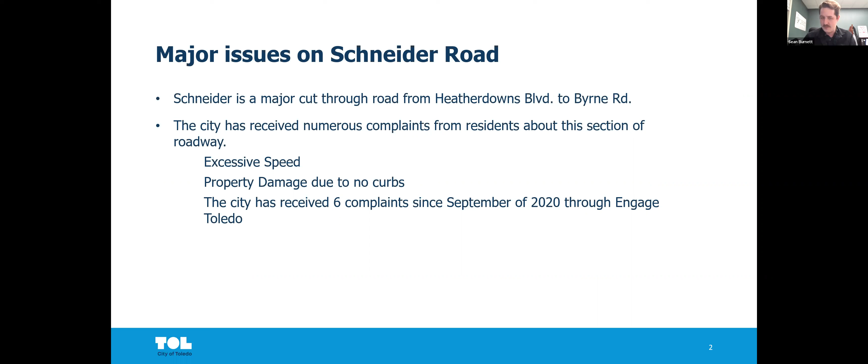So Councilman Cherry did a great job explaining some of the concerns that were brought to the Division of Transportation about Schneider Road. Obviously, it's a major cut-through. We had some complaints about property damage, road departures leading to some damage to the nearby yards, and some concerns about safety due to speeding. I think we can go to the next slide.

So the Division of Transportation performed a number of traffic studies looking specifically at the speeds of vehicles moving down Schneider Road. What we have here is a graph demonstrating that the 85th percentile speeds were around 38 miles per hour. On Schneider Road, the posted speed limit is 30 miles per hour. So obviously this represents a significant overage when we talk about safe speeds.

One of the things in traffic engineering that's really important to consider when you're looking at corrective actions is that speed limits alone are not enough to change speeds of travel for vehicles. Roads like Schneider are designed to be straight and open. Currently on Schneider there aren't curbs and things of that nature, and there isn't street parking, all of which typically help to lower average speeds on a roadway.

So we have these obvious concerns with the speed. Citizens have reached out. Councilman Cherry was very involved in talking with the city and bringing these concerns to our attention. One of the things that we came up with as a potential solution, which we've now designed, are traffic calming circles. Traffic calming circles are used to great effect in residential areas where speed is the primary concern.

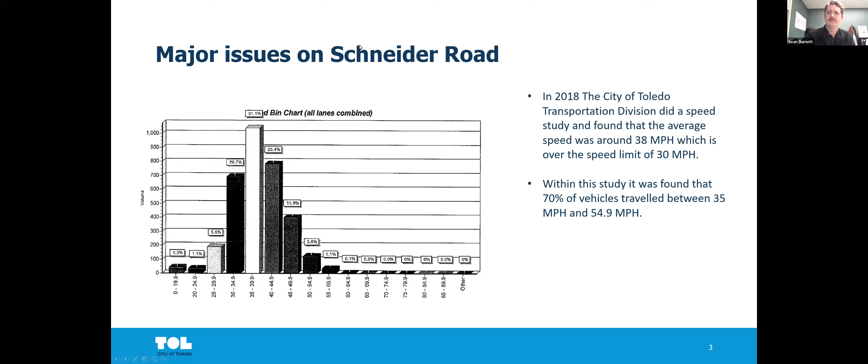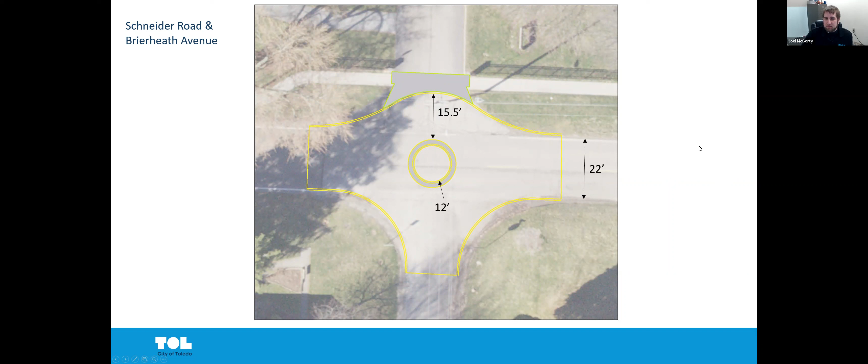The existing road right now is about 22 feet wide. We'll be making it a travel width of 15.5 feet going around the circle. The inside diameter, which will be all concrete, will be 12 feet, and the outside diameter will be 16 feet. The little gray area in between will be curb to help keep cars following the correct path. We'll also be adding curb around the outside.

It'll be a 6-inch reveal curb to help keep cars on the roadway where they need to follow around the path. As you can see here, we'll be putting in a new drive apron for the assisted living home at Brierheath and Schneider. Take a peek here at Schneider and Birchwood.

As you can see, we're not taking much property at all. We're just using the tree lawn that was already existing between the walk and the roadway. This walk will have to bounce out just a smidge, but we're talking less than a foot. So we're showing here again that the existing road is about 22 feet wide. Here's your 15.5 feet that you'll be able to travel around the circle.

All these circles are the same size. I'll go ahead and say that, even though it points it out here just for reference: 12-foot diameter on the inside, 16-foot diameter on the outside, with the 2-foot curb around the radius.

Also 6-inch curb around these areas. We'll also be installing catch basins and some storm sewers around here now that there's curb, to make sure that we take care of any drainage. That way there's no ponding on the roads.

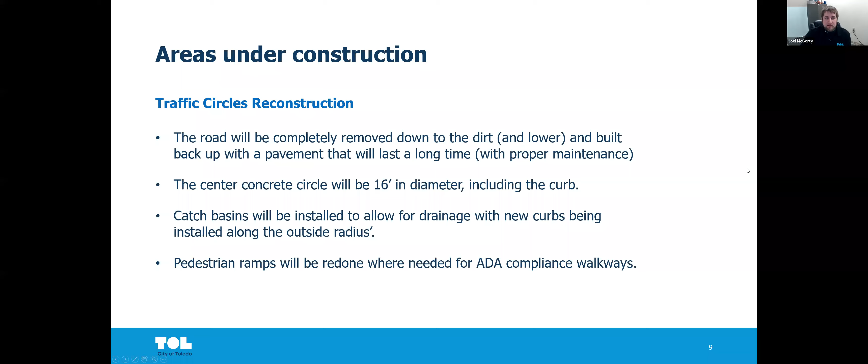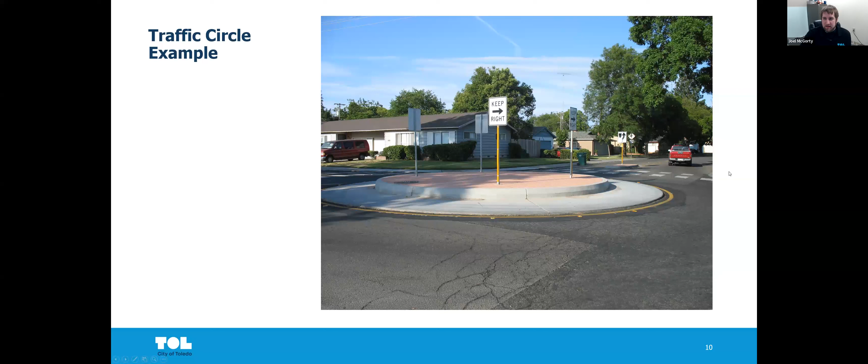During construction, each intersection would be reconstructed one by one, just to eliminate any major impacts to traffic flow. While they're being reconstructed though, there'll be a posted detour. That way you can still access around on Schneider. All properties, you'll still be able to get into all driveways. We make sure that our contractors keep everything buttoned up nice and tight. That way our residents can still get to their drives and access anything they need to.

Tim, if you want to go ahead and talk about the funding. Yeah, so the funding for this project, we are going to be using the 1/4% tax money, since this is a residential road. And we had a package go out that was council districts 1 and 2 and all of the roads that were going to be reconstructed between those 2 districts. One of them was Royal Haven. So it made sense for us to just add it into the construction for that project, because the contractor's already out there, and because of economy of scale, with such a large program, the cost came in a lot less than they typically would for something like this.

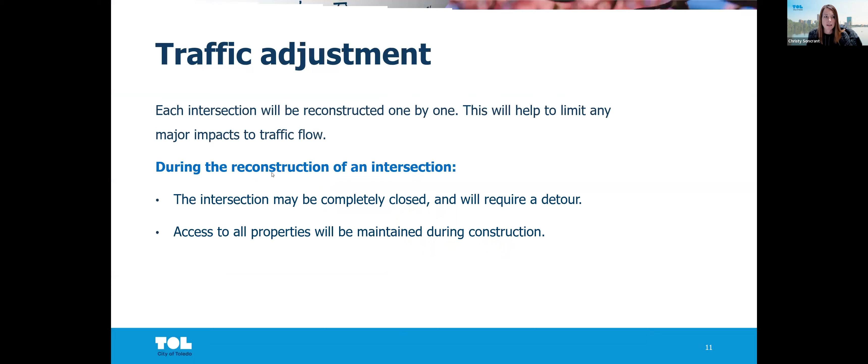Okay, first off, had a question about if the project will take any portion of the property on the corner of Schneider and Brierheath. That was one of the first examples that was shown by Joel. And as you can see, there's nothing that's being taken. It's all staying within the right of way. So the properties that are surrounding this will not be impacted by it. Next question.

Why so many circles in a short area? I don't know if Gary or Sean, you want to answer that one? Sure, Christy, I'm happy to answer it. I think that largely, the impact that these traffic calming circles have are best seen when you locate them at some of the notable intersections. One of the things I didn't mention earlier was the fact that congestion on Schneider Road was one of the citizen concerns, and that these traffic calming circles will generally make it easier to make a left out of the residential neighborhoods.

So we looked at the primary points of conflict along Schneider Road, and we chose these as the locations for them. Gary, did you want to add anything? No, I mean, that's it. If you just put one, it's only going to control speed to a very limited amount. With the 3, cars will never really be able to get up to a speed that is even close to what it was before. They'll have to slow down as they're coming up to each of these. And like I said, one isn't enough for this long of section.

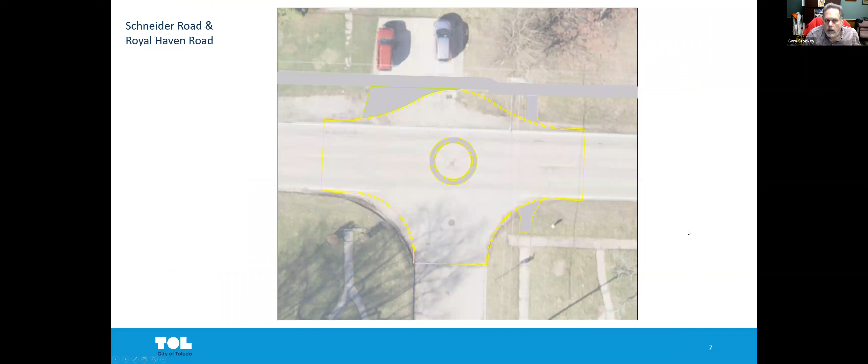Okay, we got one. The concern was raised about cars leaving the road at Royal Haven. If a car begins the radius heading west and misses the radius, the vehicle may hit the cars in my driveway or the structure itself. Yeah, they should never. That's one of the reasons why we put curbs on these streets, to keep cars within it. Without the curbing, you're more likely to get cars running over onto the bermed area or the grass area. That's why the curbs are added on all four corners, basically to try to contain them and let them know they need to come back on. These aren't huge deflections in the road, and they should be going at a slower speed now. So that should not be happening.

And also, a lot of people have not seen this kind of traffic calming. And I think when they hear traffic circles, they think of the ones that have already been put in place in Toledo or in Lucas County, the bigger ones, especially South Detroit and Byrne, not being far from this road. And this is nothing like it.

And that's what we want to make sure everyone understands, that this is just kind of forcing you to go around this little curb, a circle curb again. That's what it is. It's not a roundabout. So that's really what we want you guys to also see here.

Okay, let's see. Aw, we got a nice one. I don't know, maybe I should save that for the end. I might save that one for the end.

Okay, so does Ohio code allow for traffic controls? I've been told in the past that since it is a feeder street, that controls are not allowed. No, you can try different traffic controls on a street. ODOT, or I guess the Ohio Revised Code, or even the Toledo Municipal Code, does not dictate exactly what you need to utilize on a road. We have a repertoire of different things that we can try to control traffic in different ways that we need to. So it is allowed.

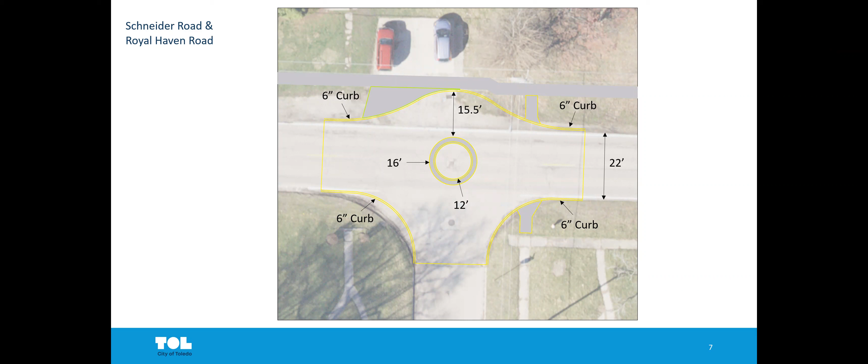So yeah, just to let everybody know, that one is still on our radar, and we're going to continue trying to get funding so that we can do something there to at least help that intersection. Okay.

Councilman Cherry has reiterated that if anyone wants to contact him regarding the project, please do so at matt.cherry@toledo.oh.gov. And I'll repeat that one more time towards the end. So if anyone wants to get something to write that down, it's matt.cherry@toledo.oh.gov.

Oh, we got another. There's quite a few people here about Muirfield. Sounds like they've also had issues. Let's see.

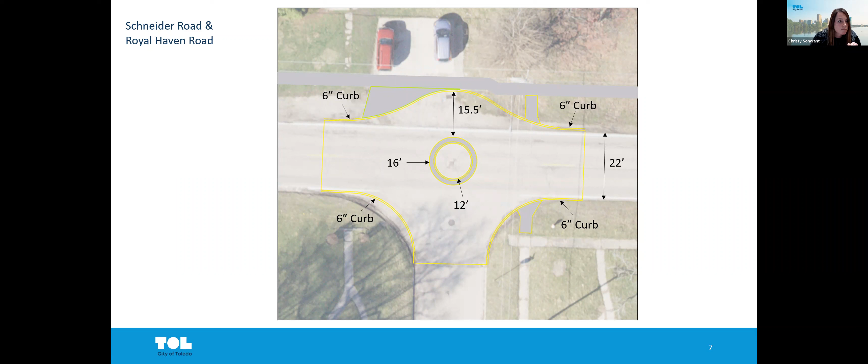We will look at, there's a question here about an ineffective catch basin in our yard at 33. Oh, that's right at the corner. Actually, I know that Joel was looking at some catch basins at one of these. This is a question about the corner of Brierheath.

And I think you're going to reroute some, you're going to do some storm work. Yep. So with this, we're going to end up tying into this basin, and that's one of our issues that we'll go out and take a look at, make sure that it's flowing correctly. Now that I know it has issues, we can actually go out and get a video of it, make sure that everything's clear down the pipe. If not, we can get it jetted through our sewers division before we tie the new pipe into it. So it'll definitely be looked at before we tie all the new pipe in there.

Okay. One of them also, they're asking about shifting the circles, Joel, to shift them more to the south and keep them out of the north side yards. Looks like there's plenty of room. I mean, you try to keep it, I'm assuming, in the middle of the road. Correct. So that's the main reason it is where it is.

We're trying to center the circle in the middle of the road. That way we can do half on each side of the road, force the cars to slow down and have to go around. If we shift it too far to the south, the cars heading westbound aren't really going to have that much of a jog in the road. They're going to be able to shoot straight through and keep that speed up instead of having to slow down and go around.

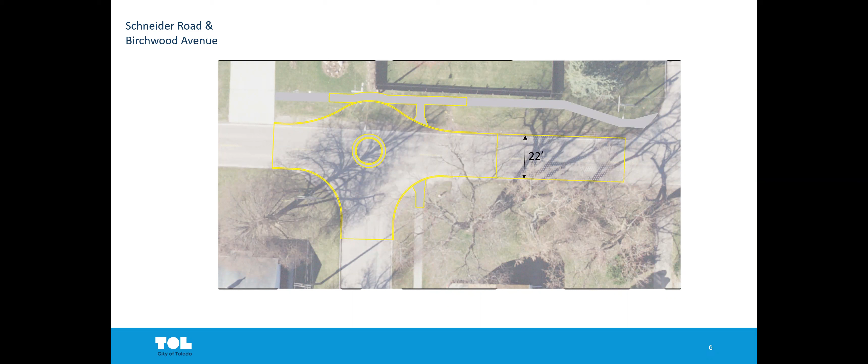Okay. Gary, just stay on here with me so I can answer the next ones. There's questions about snowplows. Yes, we've already worked with our sister division, and they'll have no issues getting through here with the snowplows. It'll all be plowed during the snow.

There is something I want to make sure I get through. There's a question here, I want to make sure everyone's aware. Someone has asked a question in regards to during construction. So during construction and people having access to their streets, of course, we have Michaelmas Manor, which is right off of one of these. And yes, there will always be access maintained to your street. There'll not be a time when you guys can't get through there some way. So access will be maintained throughout the project.

And I don't want to lie to these people. Basically, the access may be coming from a different direction. The intersection will be closed down as they tear it out and put all this in. But you'll enter off of the Heather Downs side to get into one side, then maybe come in off of Byrne to get to the other. And the side streets will just come in off of the next street that is down.

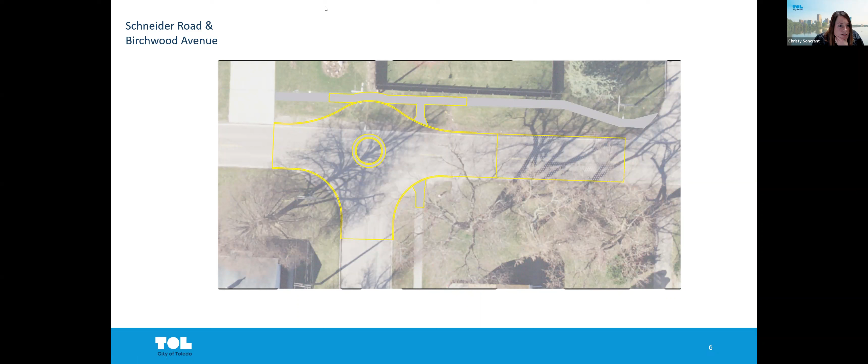They're saying at the manor. Looks like it's in one of the comments. At the manor? Oh, I see, the driveway. Yeah, the fence there. So like I said, they would do it in halves. They would make sure that at least half of the driveway is open so that regular vehicles and emergency vehicles could access the manor back there.

What contingency plans have been put in place if speeders actually hit the circle and go out of control? There have been several accidents at the Byrne and Detroit circle. I don't know if we can say we have any contingency plans. I mean, it's just like any other place throughout the city. Unfortunately, there's not much you can do. We'll have to look at the reason why they hit it, what might have caused it, if it was something to do with the design and not somebody impaired.

I mean, if we're getting accidents there, we go in and we'll take a look to see what's causing the accidents. Is it drunk drivers? Is it distracted drivers? Is it something with the design that people aren't able to navigate it safely under normal operation? Or is there additional signage needed out there to maybe make somebody aware of something?

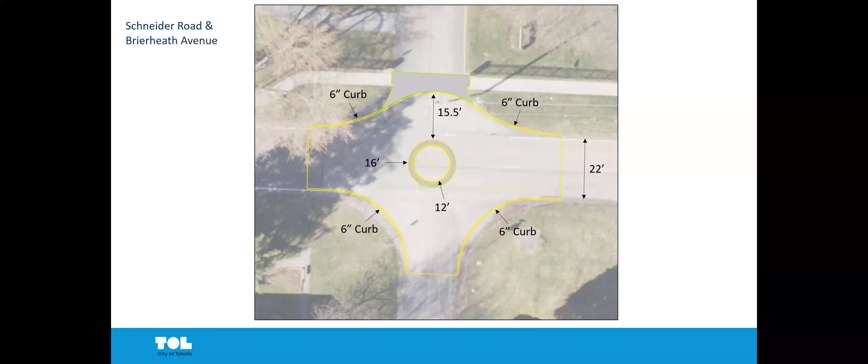Okay, well, like I said, we have all the comments that you guys have given us. I know there's a few that we're gonna go ahead and look at, like Gary had said.